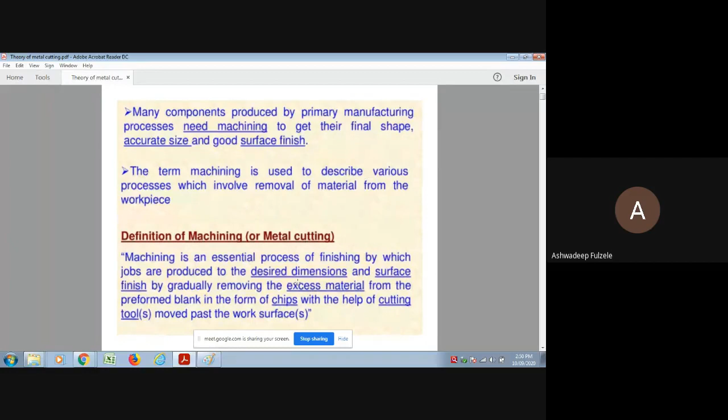The ever increasing importance of machining is gaining new dimensions in the present industrial age. The competition towards economical manufacture of machine parts means the basic objectives of economical and efficient manufacturing practice are quick metal removal, that is MRR, material removal rate, high class surface finish, economy in tool cost, less power consumption, economy in cost of replacement and sharpening of tools, and minimum lead time of machine tools.

Let me remind you all that a machine tool is nothing but a machine wherein the tool is mounted, and the actual machining can be done with the help of that particular machine. That setup is called a machine tool.

In what parameter is the machining economical? One, the material removal rate is high, class surface finish is there, economy in the tool cost, lesser power consumption, economy in cost of replacement and sharpening of tools, and minimum lead time of machine tool. Minimum lead time means the idle time should be minimum.

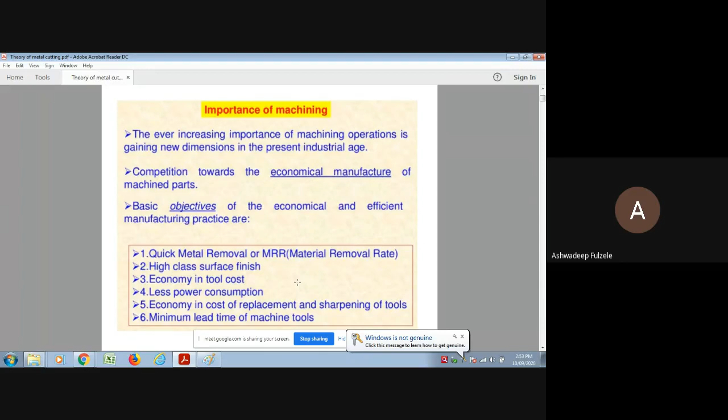Before the taper turning attachment, I would like to tell you that mounting the single point cutting tool itself takes a lot of time. We will have to match the live center, the tool center, and the dead center of the lathe machine - it takes a lot of time. We will have to remove all these hurdles while performing machining operations. It has to be economical. Until and unless it is economical, how will people be urged to buy any product if it is expensive? So the machining has to be a very economical one.

Now, what is a machine tool? A machine tool is a machine for shaping or machining metal or other rigid materials, usually by cutting, boring, grinding, shearing, or other forms of deformation. These deformations here are permanent deformations. The machine tools employ some sort of tool that does the cutting or shaping.

The classification, as you can see on your screen, is the single point cutting tool operation, multi-point cutting tool operation, and the abrasive operations. The machining processes are mainly classified into these 3 parameters. We can use single point cutting tool, multi-point cutting tool, and abrasive operations.

Now, why is the single point cutting tool called so? Though the cutting tool may have multiple cutting edges, we still call it a single point cutting tool. While performing the cutting operation, only a single cutting edge actually participates in machining, in removing metal. That is why it is called a single point cutting tool.

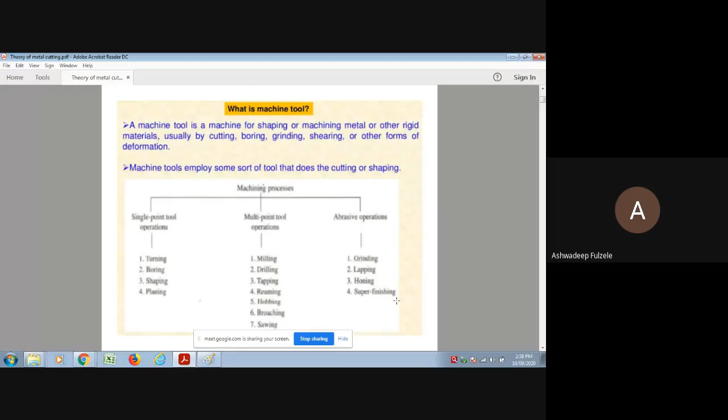The classification of cutting tools. The cutting tools used in metal cutting can be broadly classified as single point cutting tool and multi point cutting tool. We have already discussed on what parameters the cutting tools are classified, and why they are specifically called single point or multi point cutting tools: while performing the machining operation, if a single cutting edge participates, it is called a single point cutting tool; if it is two or more, it is called multi point.

Some examples include the lathe tool, shaper tool, planer, and boring tool. The boring machine, the boring tool, and related operations are like counter boring and counter sinking. That is how you can remember the boring operation: enlarging the existing hole is called the boring operation.

Whereas in a multi-point cutting tool, those have more than one cutting edge, meaning two or more. Examples include milling, drilling, grinding, etc.

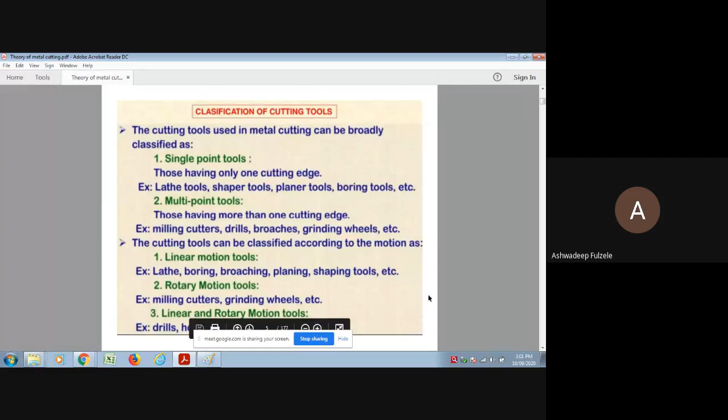On which kind of machines are rotary motions given? In milling and grinding machines, rotary motion is given. Whereas linear and rotary motion combined can be seen in drilling operation, as you can see.

How does the cutting take place? For providing cutting action, a relative motion between the tool and workpiece is necessary. This relative motion can be provided either by keeping the workpiece stationary and moving the tool, or by keeping the tool stationary and moving the workpiece, or by moving both relative to one another, as happens in grinding and other operations.

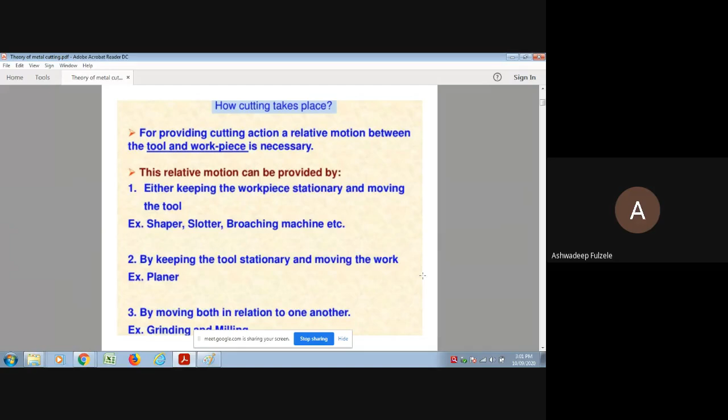My dear friends, you might have seen those figures earlier under the same heading of theory of metal cutting: one rigid, hard cutting tool is moved past the workpiece. When it comes in contact, tremendous heat is generated due to friction. We apply more and more energy, more load, more force, more pressure, and with the application of force, the shearing ultimately leads to tearing of the workpiece. That is how machining takes place.

In this figure, as you can see, it shows the single point cutting tool and the rotary workpiece that we mount onto the spindle of the lathe machine. In this figure, you can observe different other parameters: the tool and the chip more predominantly, and the workpiece, as you can see.

Other important parameters we are going to discuss in detail in the next consecutive slides.

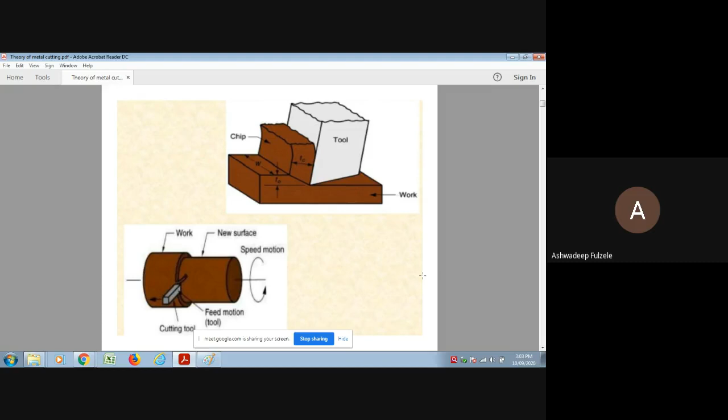My dear friends, the GATE examination is more focused and concentrated over the numericals. The numericals are more likely asked in almost all the sections of the topics being asked. Whether it is a theoretical subject, it may pretend to be theoretical, but there has to be certain calculations, there has to be some manipulations in order to achieve those figures. That is why the numerical is the most important backbone in GATE examination.

My dear friends, how the machining takes place is being briefly explained through these diagrams. With the help of these diagrams, we can see the lathe turning, milling, drilling, shaper, broaching, and the grinding.

What kind of motion is given, whether it is to the workpiece or the cutting tool? You can understand the material removal operations, isn't it?

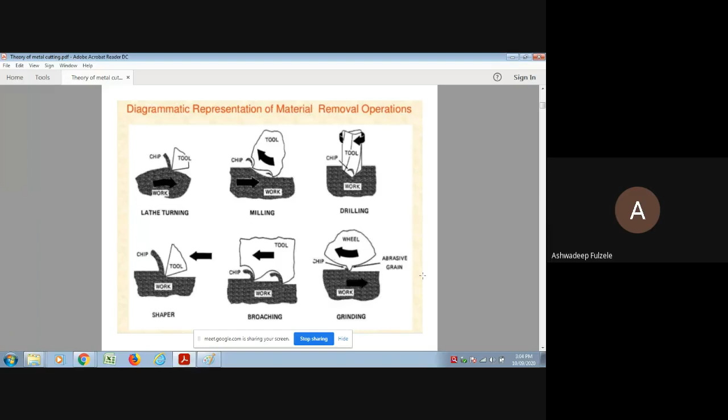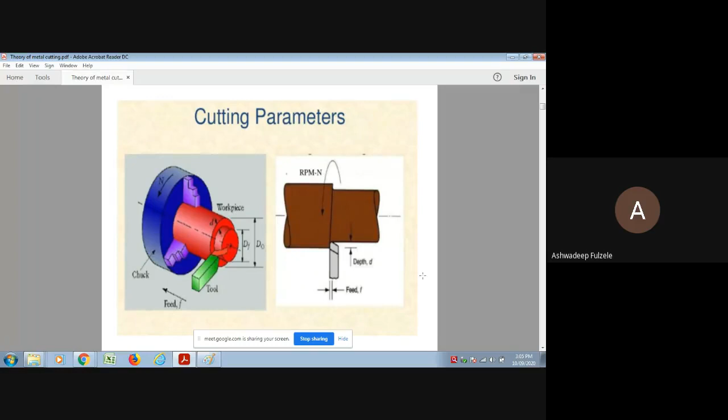Other important cutting parameters: the cutting speed, of course. While performing a machining operation in a lathe machine, we provide rotation to the spindle, that is nothing but the workpiece. The workpiece is in rotary motion, with a certain revolutions per minute. The cutting speed is the largest of the relative velocities of the cutting tool or the workpiece. In turning, it is the speed of the workpiece, while in drilling and milling, it is the speed of the cutting tool which has to be measured.

In GATE examination, they ask certain questions over the rotation and the material being removed, with other specifications like the depth of cut, outermost diameter, and the finishing diameter. We are going to see this very soon.

The cutting speed is the distance traveled by the work surface in unit time with reference to the cutting edge of the tool. The cutting speed of the cutting tool can be defined as the rate at which its cutting edge passes over the surface of the workpiece in unit time. It is normally expressed in terms of surface speed, referred to as speed, and expressed in meters per minute.

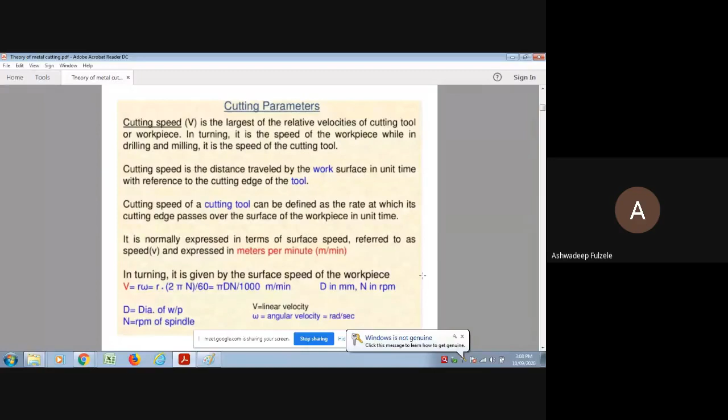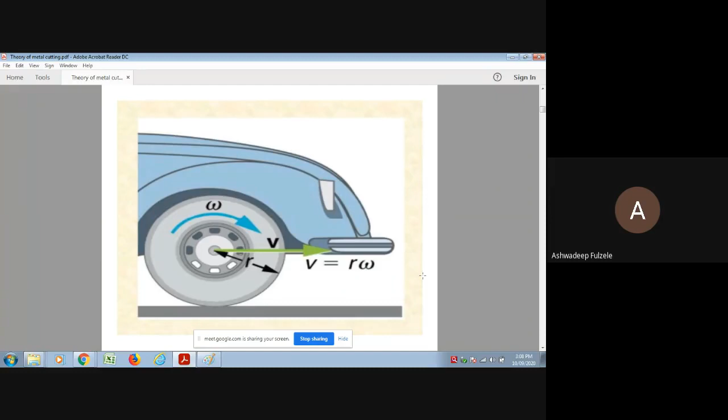In turning, it is given by the surface speed of the workpiece. V is nothing but the velocity. V is equals to R omega. Omega is also explained as 2 pi N by 60. N is nothing but the revolution per minute of the spindle, of the workpiece. We can observe this with the animation of this figure. Omega you have studied in your school days itself. Omega is nothing but the revolution or the rotation, rotation per minute.

The other cutting parameter is the feed. Feed is the distance advanced by the tool into or along the workpiece each time the tool point passes a certain position in its travel over the surface. In case of turning, feed is the distance that the tool advances in one revolution of the workpiece. Feed is usually expressed in mm per revolution. Feed in mm per minute is nothing but the feed in mm per revolution into N.

Next important parameter is the depth of cut. The depth of cut is nothing but the distance through which the cutting tool is plunged into the workpiece surface.

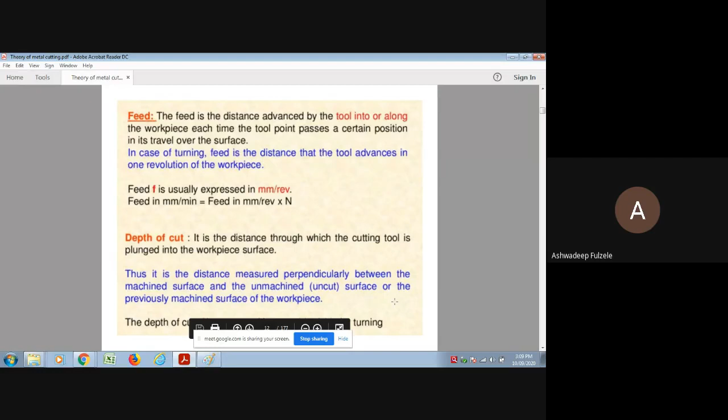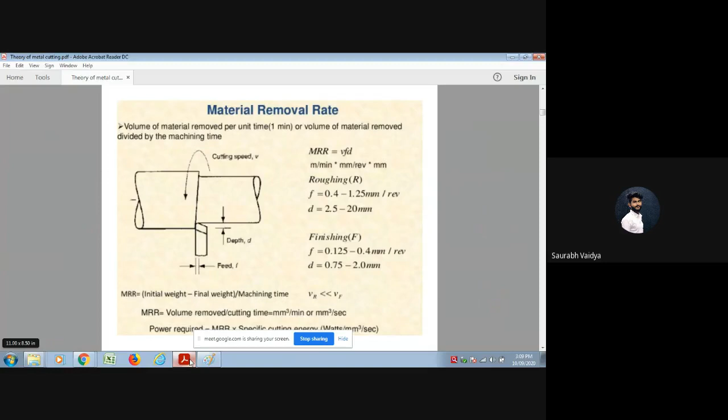Let me go through the app and let me check it again whether I am audible to you all or not. Am I audible? Yes. Is there any echo in my voice?

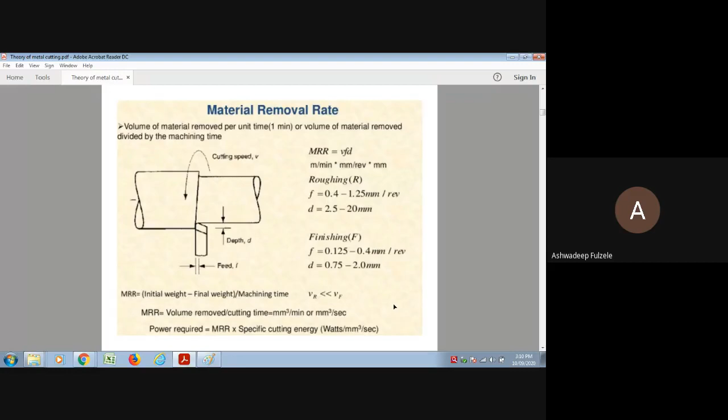Now the single point cutting tool. My dear friends, you have already studied the different faces, different angles of the single point cutting tool. We will just shortly revise those.

Why? Because it is being asked in your GATE examination - the particular face, the adjacent face, the major cutting edge, where it is located, where it is mounted, the particular angle between the other faces. These are the most likely questions to be asked in your GATE examination, isn't it?

Two parts of the cutting tool: first is the shank and the flank. Three faces of the shank. Through this you can remember the different faces of SPCT. SPCT is nothing but the single point cutting tool.

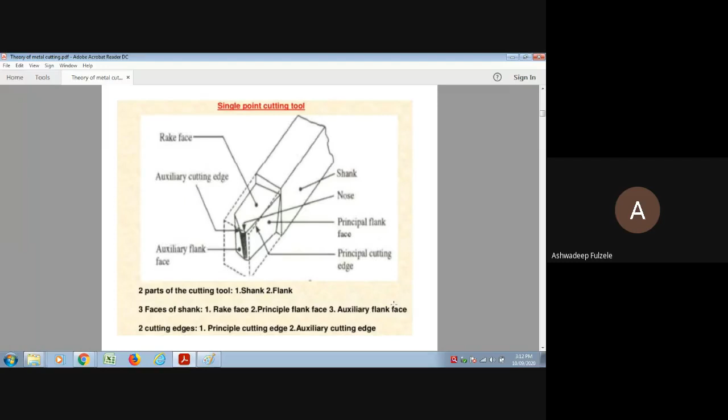We will discuss in very short what is shank. It is the main body of the tool. It is part of the tool which is gripped in the tool holder. Face - top surface of tool between shank and point of tool. Chip flow along this face.

As you could remember, the back rake surface and side rake surface, back rake angle and side rake angle - these are most important faces through which the chip flows. We can provide the rake angle as positive, zero, or negative rake angle. We are going to learn all those things in next consecutive slides.

Face - it is nothing but the top surface of the tool. Flank - it is the portion of tool which faces the work. It is the surface adjacent to and below the cutting edge when the tool lies in a horizontal position.

What is the point? The wedge-shaped portion where face and flank of the tool meet. Base - bearing surface of the tool on which it is held in a tool holder.

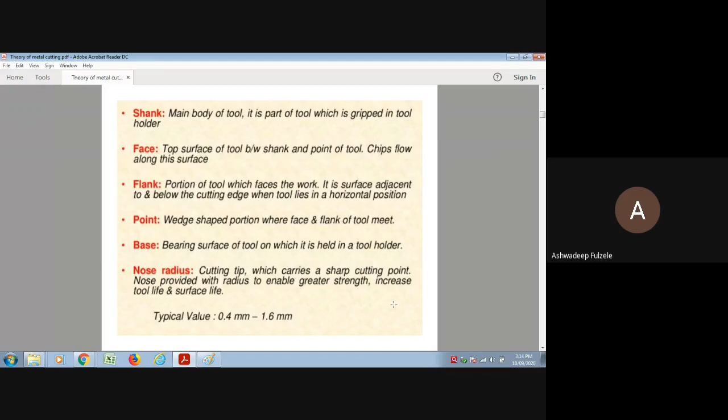Tool terminology - the other cutting edges, as per the American Standard Association, according to the American Standard Association there are certain classifications of the cutting tool provided.

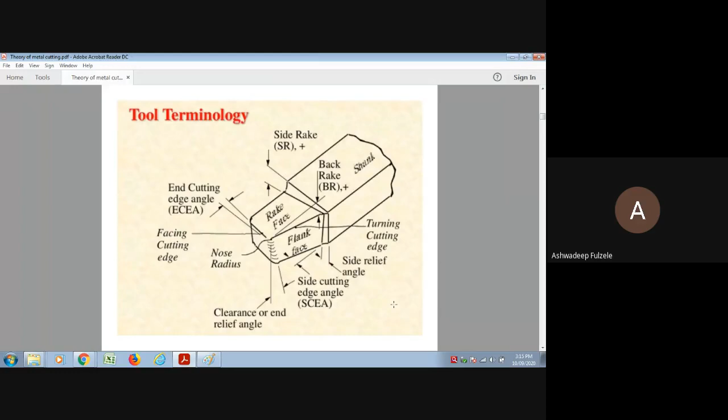There is the arrangement of the cutting edges like back rake angle, side rake angle, end relief angle, side relief angle, end cutting edge angle, side cutting edge angle, and at the end, the nose radius. We are going to see those topics and their arrangement, in what fashion they are arranged.

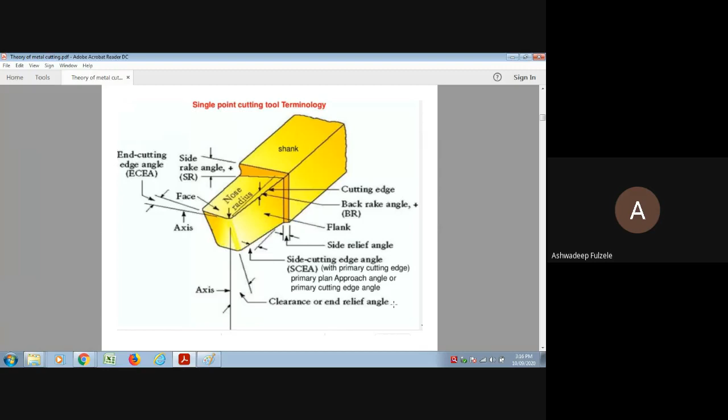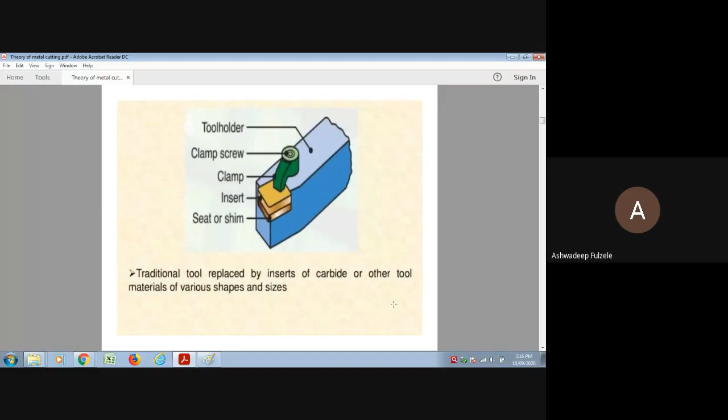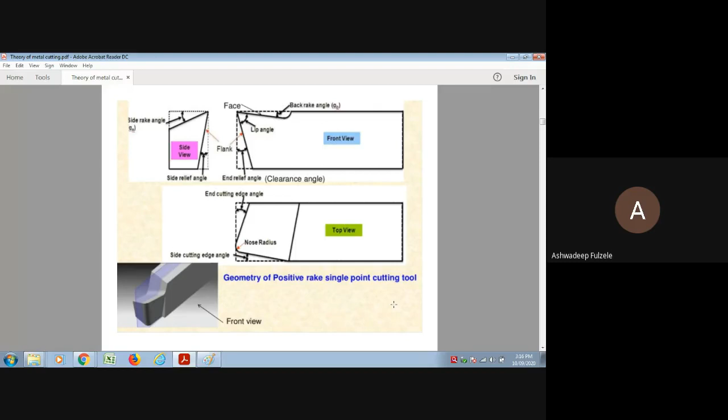Now rake angle - there are two rake angles, back rake angle and side rake angle. As we discussed earlier, we can provide the positive rake angle, we can provide the zero rake angle, we can provide the negative rake angle as well.

And how does it look like? Through this figure you can see positive rake angle. You all are aware about the positive rake angle, you people have drawn the diagram. But as far as GATE examination is concerned, in GATE point of view, you will have to understand diagrammatically the negative rake angle and the zero rake angle.

My dear friends, as we have discussed earlier, the rake is the surface through which the chip flows, isn't it? There are certain materials for which we provide those rake angles - positive, negative or zero.

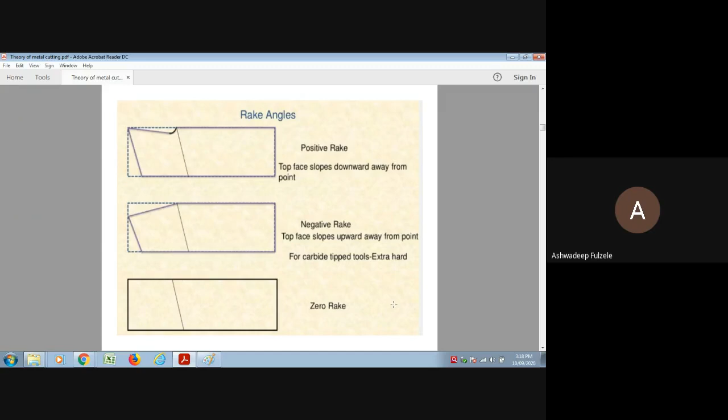The nomenclature of single point cutting tool - these nomenclatures are as far as the American Standard Association is concerned. On those prescriptive manner, we have arranged those angles, isn't it?

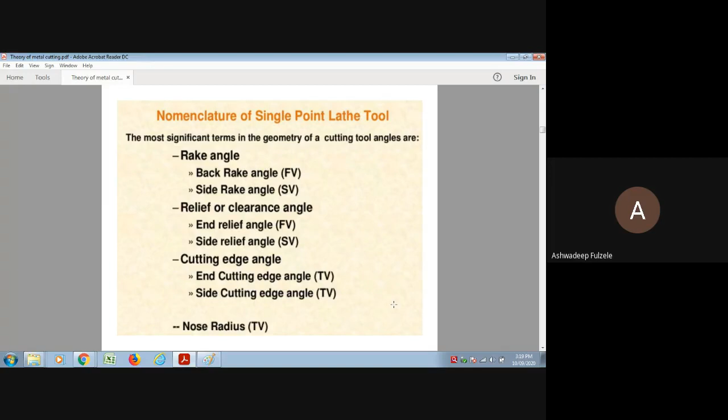The most significant terms in the geometry of cutting tool angles are rake angle - back rake and side rake; relief or clearance angle - end relief or side relief; and another angle is the cutting edge, further classified as end cutting edge or side cutting edge angle. And at the end, there is the nose radius. The rake angles you have seen.

I would like to discuss the negative rake angle. In most university examinations, this topic is not discussed in much detail because it is a lesser descriptive topic. But GATE examination may ask about the negative rake angle, about its characteristics and properties. So we will go through it.

What is the negative rake angle? If the face of the tool is so ground that it slopes upward from the point, it is said to contain negative rake angle. It obviously reduces the keenness of the tool and increases strength of the cutting edge. Such a rake is usually employed on carbide tip tools for providing more hardness.

It is used when machining extra hard surfaces like hardened steel and for taking intermittent, very critical cuts over any other type of material. For machining hard material, we will have to provide negative rake angle over the cutting tool. A tool with negative rake will have a larger lip angle, resulting in a stronger tool. Favorable value for tip tools normally varies from 5 to 10 degrees.

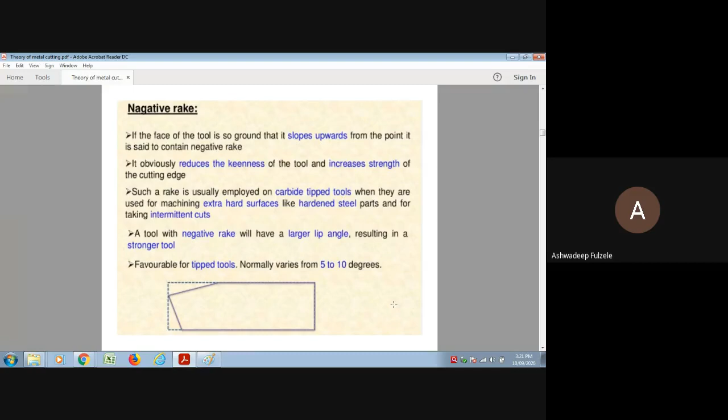Next is the lip angle. The lip angle is nothing but the wedge angle or angle of keenness, the angle between the face and the flank of the tool. My dear friends, the GATE exam may ask about the presence of any particular angle, where it is located. In the options, they will provide references, whether the angle is present between the face and the flank, major cutting edge, minor cutting edge, side flank, minor flank, near the base, or elsewhere. Out of those, you will have to choose the correct one.

You are all aware about the negative mark system in the GATE exam, so you will have to choose wisely. In GATE exam, they tend to create confusion. All the appearing options will look the same, but you will have to remember the figures you have seen and practiced drawing. With that practice only will you remember and be assured of the position of any particular edge or face.

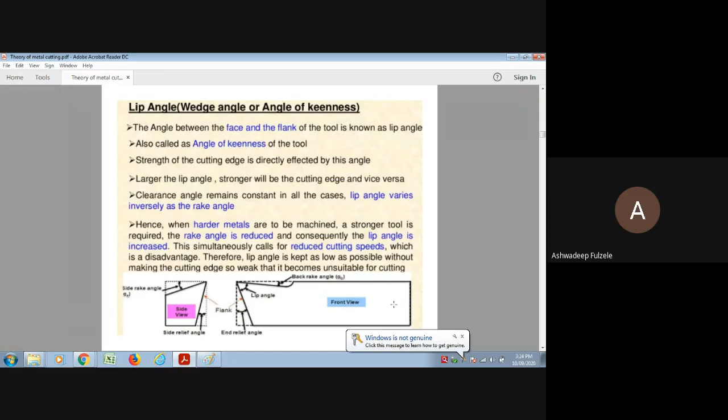The cutting tool terms: rake angle is ground on a tool to provide a smooth flow of the chip over the tool so as to move it away from the workpiece.

The terminology for the back rake angle: it is ground on the face of the tool and influences the angle at which the chip leaves the nose of the tool. Generally, the back rake angle is provided with 8 to 10 degrees.

Side rake angle is ground on the tool face away from the cutting edge. It influences the angle at which the chip leaves the workpiece. A lathe tool has around 14 degrees of side rake angle.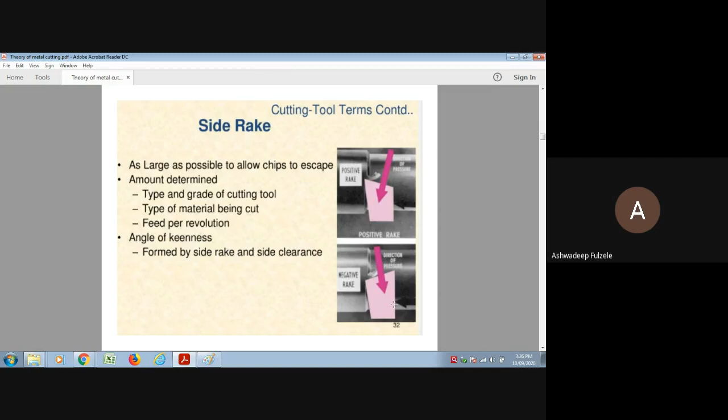The rake surface should be as large as possible to allow the chips to escape, as we have already understood. The amount is determined by the type and grade of the cutting tool, type of material being cut, feed per revolution, angle of keenness formed by side rake, and side clearance.

Another diagrammatical representation of the positive and negative rake angle. How does the pressure get exerted, isn't it?

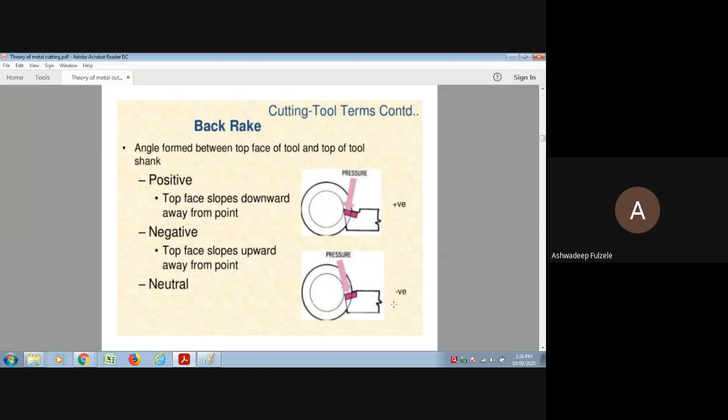Now we will discuss the relief or clearance angle. Its title itself indicates the positioning. When we mount the cutting tool over a tool post, and it comes in contact with the rotating workpiece, clearance has to be provided to avoid friction between the machined surface of the workpiece and the cutting tool. Why is clearance required? To avoid friction between the machined surface and the cutting tool. If proper clearance angle is not provided, it may rub the finished surface of the workpiece with the cutting tool.

In tool terminology, we will discuss these positions. It is ground on the end and side faces of a tool to prevent it from rubbing on the workpiece, enabling only the cutting edge to touch the workpiece and cut freely without rubbing against the surface of the job. Side relief angle and end relief angle are the two bifurcations of the clearance or relief angle. The side relief angle is the angle ground directly below the cutting edge on the flank of the tool. The end relief angle is the angle ground from the nose of the tool.

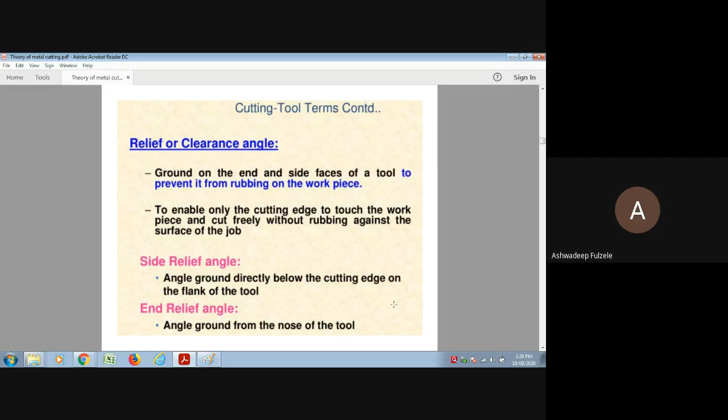Now, the cutting edge angle - as you could remember, there are side cutting edge and end cutting edge angle. Where is the positioning, and on what parameters are they ground? They are ground on a tool so it can be mounted in the correct position for various machining operations. Side cutting edge angle allows the flank of the tool to approach the workpiece first. It spreads the material over a greater distance on the cutting edge, thereby thinning out the chip. Approximately 15 degrees is provided for the side cutting edge angle.

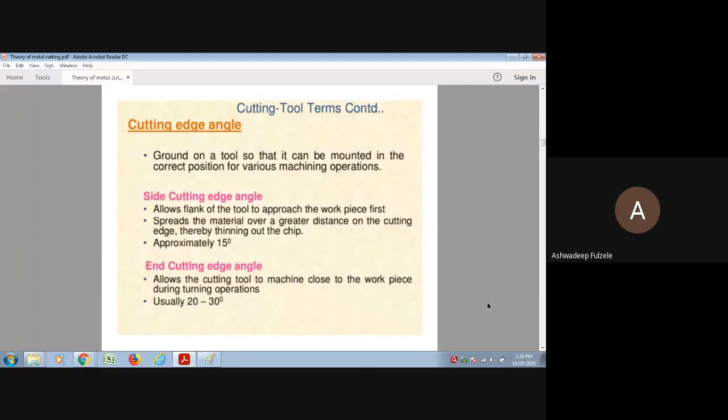End cutting edge angle allows the cutting tool to machine close to the workpiece during the turning operation. Usually 20 to 30 degrees is provided for the end cutting edge angle. And finally, the nose radius - it is the rounded tip on the point of the tool. Approximate radius is around 0.4 to 1.6 mm. The function of nose radius is that it strengthens the finishing point of the tool.

In our discussion, we have concentrated our talk over the nose radius. The surface finish depends upon the nose radius, and the tool strength and tool life will depend upon the nose radius. It should be in the range of 0.4 to 1.6, depending upon the type of material to be machined and its hardness level.

The nose radius improves the surface finish on the work. It should be twice the amount of feed per revolution - I'll repeat, it should be twice the amount of feed per revolution. If the nose radius is too large, chatter will take place. Chatter is the unnecessary vibration generated during the machining operation.

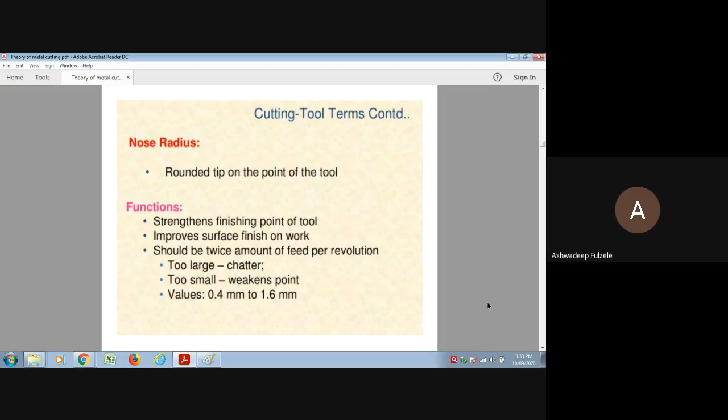As we discussed earlier, the generalized range of nose radius is from 0.4 mm to 1.6 mm. My dear friends, the tool signature we were discussing -

it is the system of designating the principal angles of the single point cutting tool. We have discussed the American Standard Association. It is very rare to ask a question on the orthogonal rake system, but I have seen many times they have asked questions on it also. So the signature is the sequence of numbers listing the various angles in degrees and the size of the nose radius. The two systems widely used are ASA and ORS - American Standard Association, and the Orthogonal Rake System, isn't it?

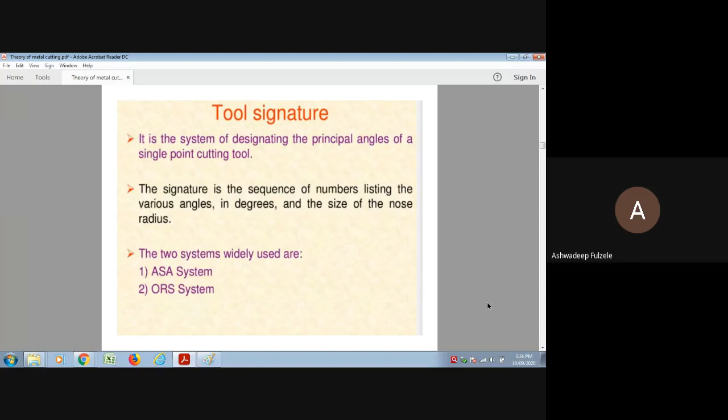The arrangement of angles with their symbols, as you can see on your screen. Firstly, back rake angle is mounted, side rake angle, end relief angle, side relief, end cutting edge angle and side cutting edge angle, and at the end the nose radius is kept. It is arranged at the end.

The other symbolical representation of end cutting edge angle and side cutting edge angle is as phi E or phi S. In other textbooks, in other reference books, you may find other symbols. The other possibility is the representation through phi.

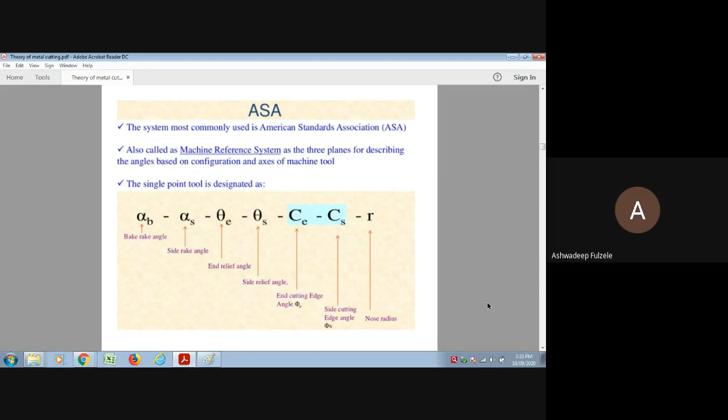The generalized angle range, you can see. If in examination, in GATE examination, they ask like 8 dash 14 dash 6 dash 6 dash 6 dash 15 dash 1, then you will have to understand the angle range, because in numericals they will ask in force calculation, in stress calculation, in the measurement of torque and other parameters, the question may appear in this fashion. So you will have to understand the arrangement, and if it is not mentioned which kind of arrangement is there, you will have to consider it as the American Standard Association.

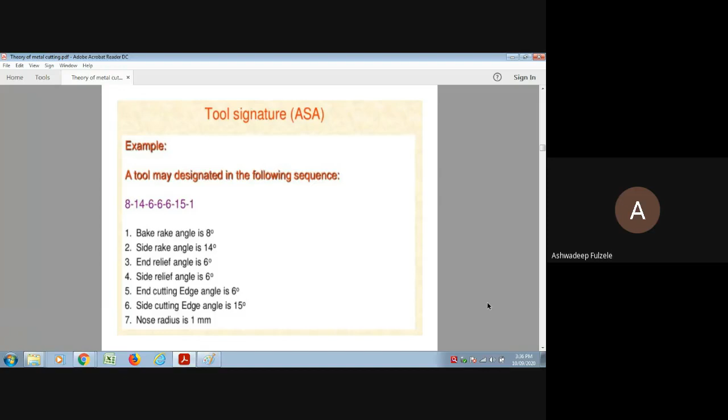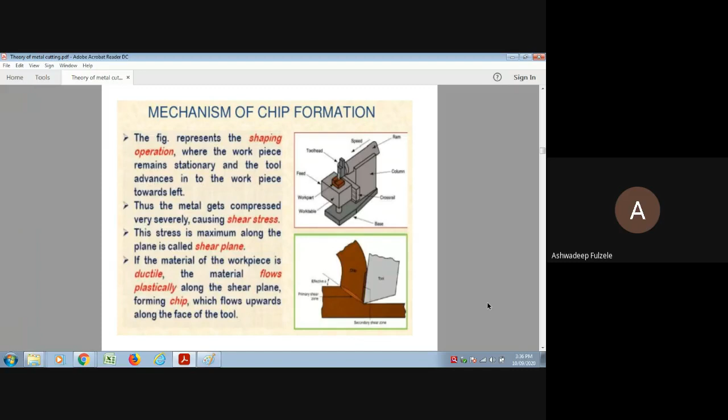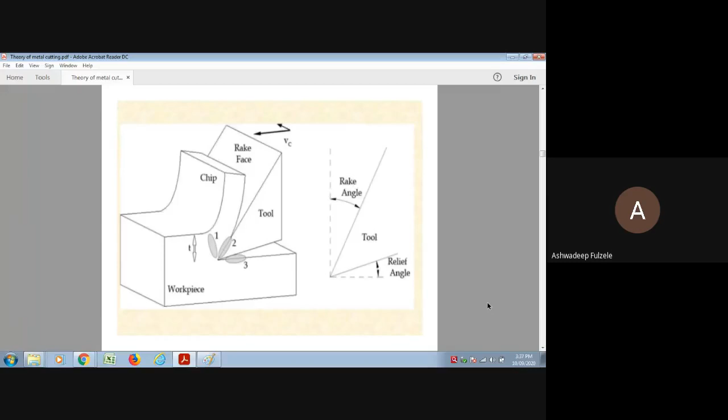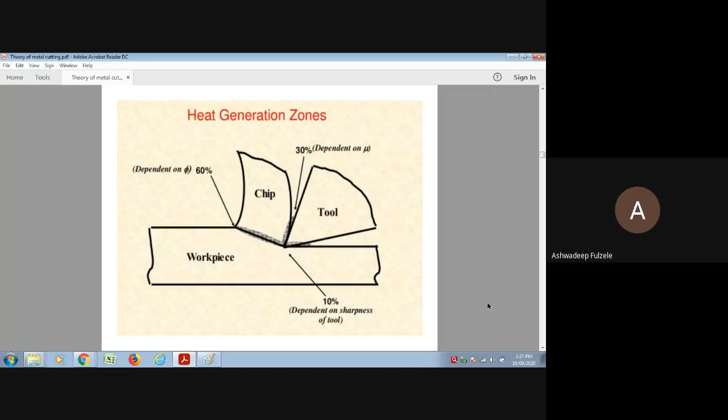My dear friends, the mechanism of chip formation we have discussed already. The shearing zone, this zone you people have seen, you have discussed. Through serial number 1, 2, and 3, we can observe the three different zones: chip and the tool, tool and the finished workpiece, finished surface of the workpiece. Through those, we can observe the different surfaces, different faces. Heat generated zone, of course, along with those three zones, the heat is being generated.

Chip formation - I have seen the question appearing in GATE examination on the topic of types of chip and how it takes place, under what circumstances those particular types of chips are formed. I have seen it several times, so you should answer it in a very broad-minded way.

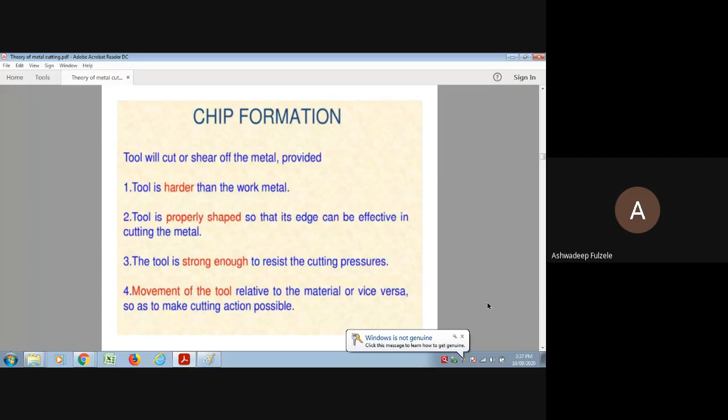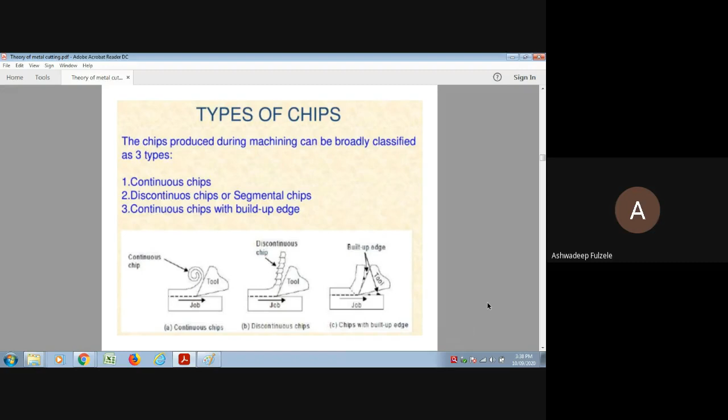Of course, there are three different types of chips: the continuous, discontinuous, and the built-up edges. Under what circumstances those types of chips are produced, those types of chips are formed, we will discuss it shortly.

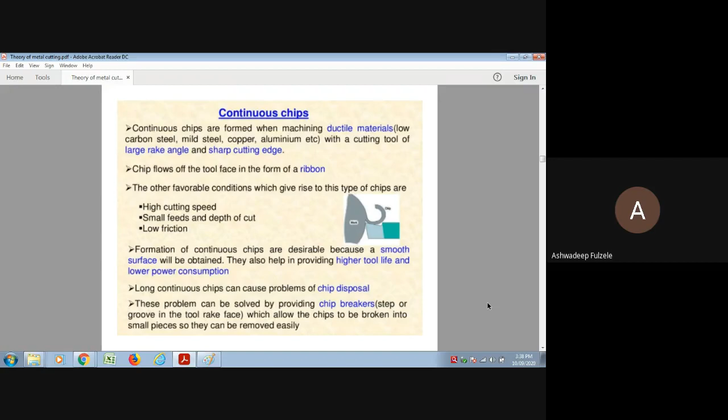The continuous chips are formed when machining ductile materials. If a larger rake angle is provided on the tool, if sharp cutting edges are used, then continuous chips can be achieved. The other points relevant to the formation of continuous chips are high cutting speed, small feed and depth of cut, and lower friction - these parameters are also responsible for the formation of continuous chips.

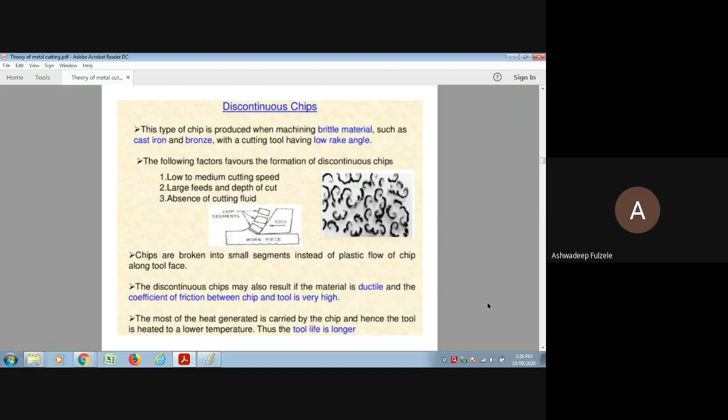Now, the discontinuous chip - if the workpiece material is brittle, if lower rake angles are provided on the cutting tool, in those cases we can get discontinuous chips. The other parameters responsible for the formation of discontinuous chips are low to medium cutting speed, large feed and depth of cut, and the absence of cutting fluid. These are the parameters responsible for the formation of discontinuous chips.

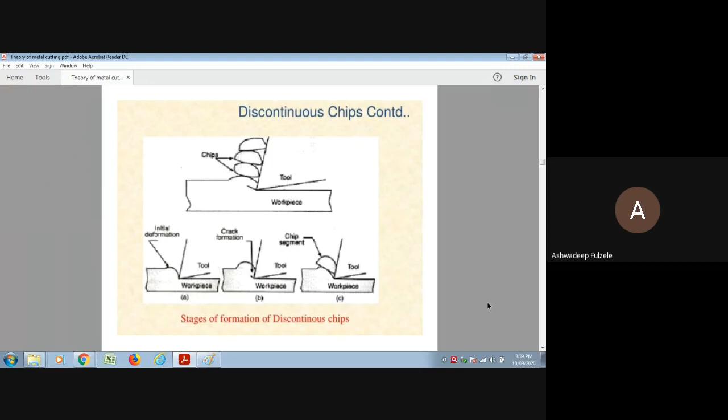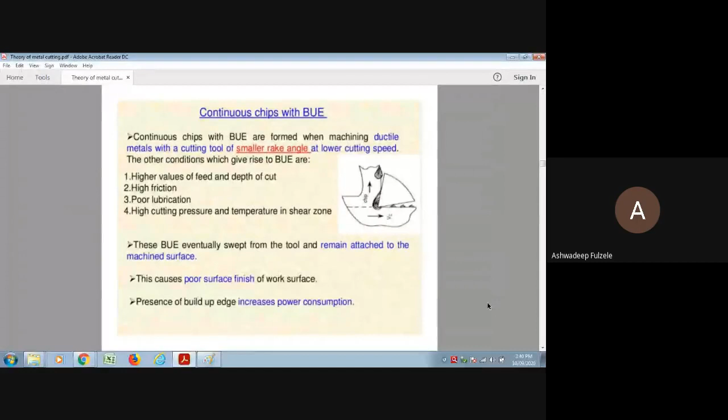The continuous chips with built-up edge - under what circumstances built-up edges are formed: machining ductile metals with a cutting tool of smaller rake angle at lower cutting speed. These are the favorable conditions under which continuous chips with built-up edges are formed. The built-up edges more predominantly form over the rake surface of the cutting tool. The other factors responsible for the formation of built-up edges are higher values of feed and depth of cut, higher friction, poor lubrication, and high cutting pressure and temperature in the shear zone. Under those circumstances, built-up edges are formed.

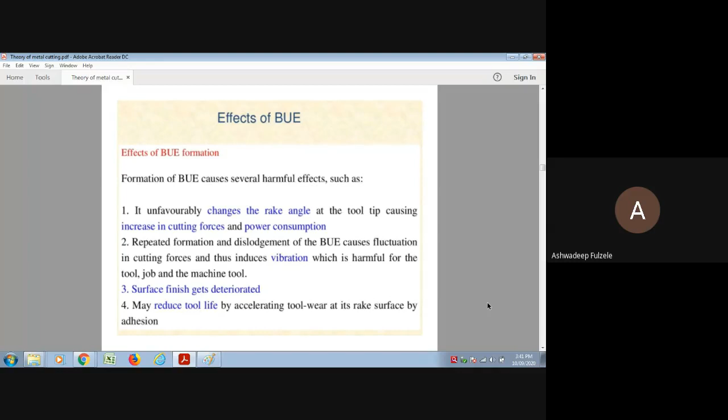The effect of built-up edges: it changes the rake angle, it increases the cutting force and power consumption. More vibration is generated during the machining operation. Surface finish gets deteriorated - better surface finish cannot be achieved with built-up edges. Though one might think tool life is increased, it may actually reduce tool life by accelerating tool wear at its rake surface due to the adhesion of chip material over the rake surface of the tool.

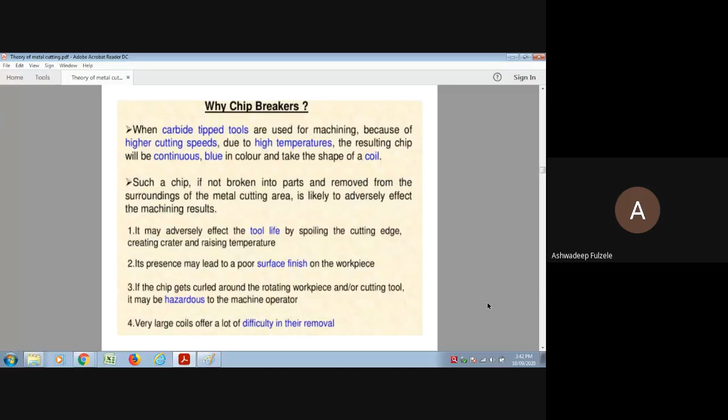With this, I would like to conclude today's session. In our next session, we will continue with the remaining topic of the theory of metal cutting.